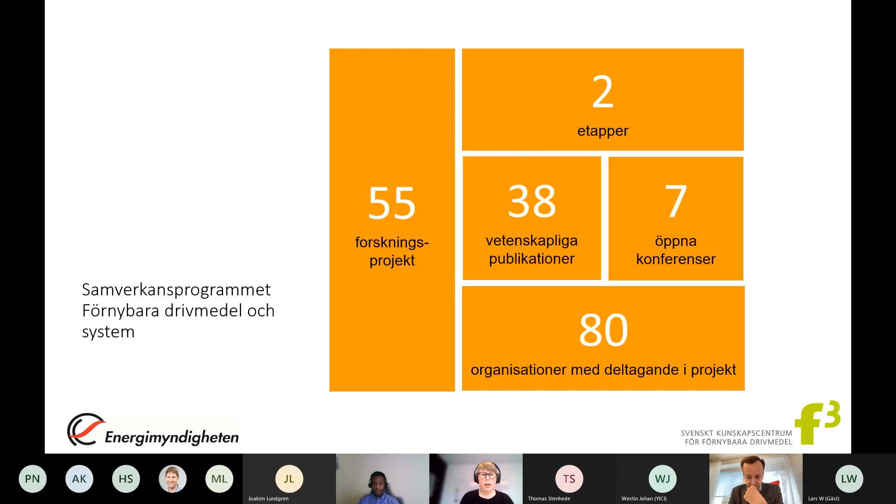Några ord kort om F3. Vi är en samverkans- och nätverksorganisation där vi samlar industri, högskolor, institut och myndigheter som delar synen på långsiktigt hållbar drivmedelsförsörjning till transportsektorn. Våra parter är en akademigrupp med Lunds universitet, SLU, KTH, Chalmers och Bio4Energy, som är ett samarbete mellan Umeå universitet, LTU och SLU i Umeå. Sedan har vi industrigruppen: Lantmännen, Preem, Neste, E.ON, Scania, ST1 och Volvo. Vi har de tre stora forskningsinstituten på området, IVL, RISE och VTI, samt samarbete inom samverkansprogrammet med Energimyndigheten och för övrigt inom F3 med Västra Götalandsregionen.

Vi har ingen politisk agenda och ägnar oss inte åt lobbying eller något sånt. Utan det här är helt och hållet samverkan och kunskapsbyggande som är i fokus.

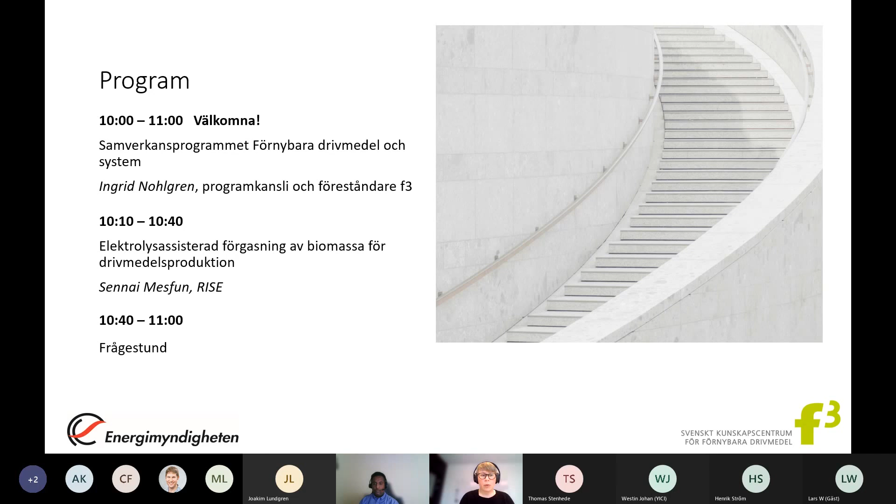Då återgår vi till programmet här. Vi ska strax få lyssna på Sennai Mesfun som ska hålla sin presentation, och det kommer han göra på engelska. Den efterföljande frågestunden kommer också att vara på engelska. Avslutningsvis, här har vi lite korta fakta om projektet.

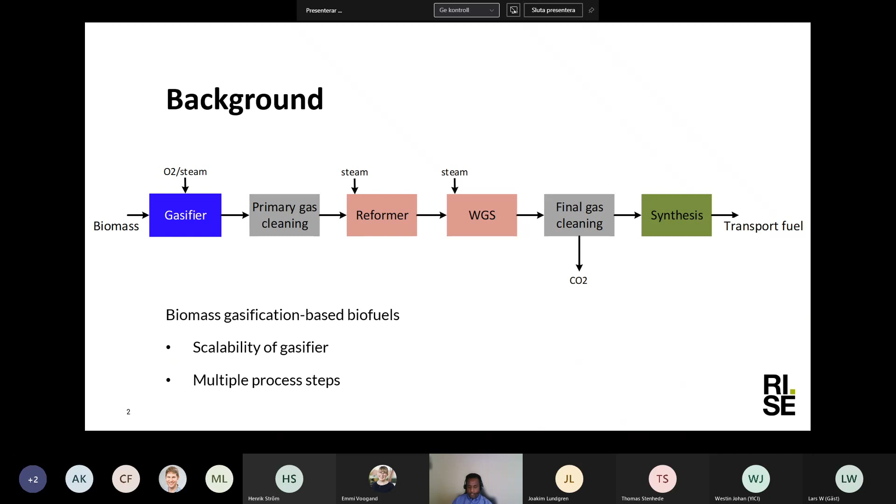In that regard, this project looks at electrolysis-assisted biomass gasification, where an electrolysis process integrates into the system, if possible reducing some of the downstream processing required, and also co-produces some of the internally required oxygen as an additional incentive.

But the most important aspect of integrating an electrolysis process with gasification is, of course, to increase the productivity without having to introduce an additional carbon source, or in other words, without scaling up the gasification step.

This project specifically looks at that, and at what cost, to what extent the product yield can be boosted without an additional carbon source, and either way, the possibility to reduce some of the process steps in a conventional gasification-based process.

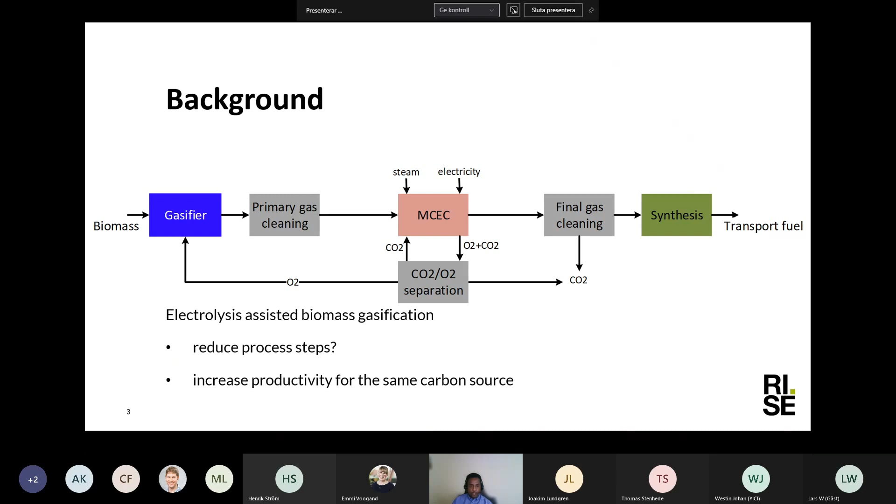So in order to frame this, we defined an objective: to investigate a molten carbonate electrolysis cell for syngas conditioning. How far can this take us when it comes to improving productivity, reducing some of the process steps, and at what cost can that be achieved?

Another additional advantage or benefit to look at is to what extent we can link electricity into producing liquid fuels, in the context of power-to-liquid in this case.

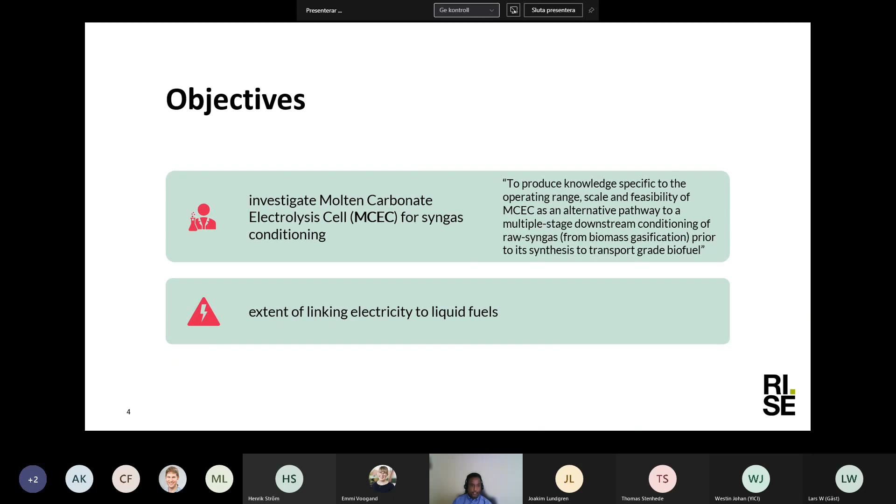So in order to frame this study from a system perspective, we opted to integrate a sustainable aviation fuel production facility at a generic sawmill as a host facility.

In a typical Nordic sawmill, about 50%, or half, of the incoming timber ends up in the byproduct stream, and the remaining half becomes the final lumber product. In business-as-usual operation, this byproduct would largely be exported to other forest industries, such as pulp mills in the form of wood chips and wood pellet plants in the form of sawdust.

But central to this is the integration of the MCEC in that gasification-based SAF facility, since MCEC is the technology that we decided to study further in this project.

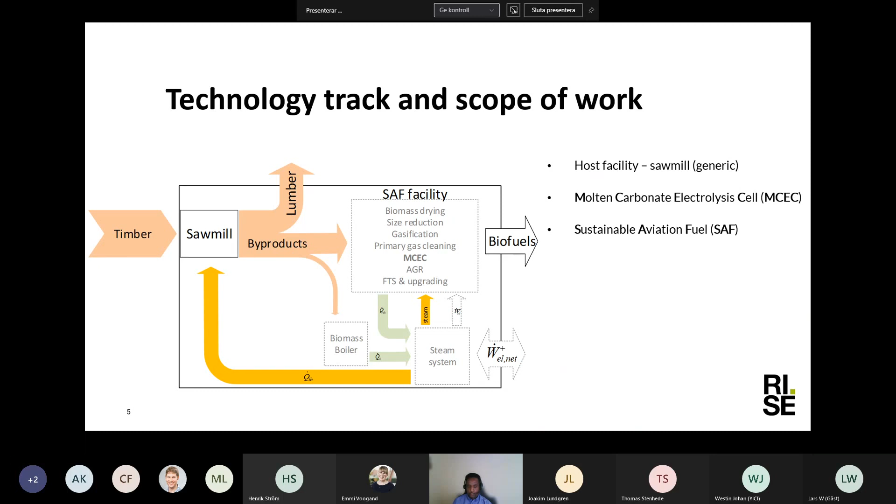It will be important to say a few words about it: its operational parameters and what our model was based on. We developed an MCEC model based on previously conducted experiments at the Royal Institute of Technology at lab scale, and operational data from those experiments was extrapolated to develop a model for this project.

So of course, as is the case for most electrolysis processes, the polarization curve is very important, which is the voltage-current curve. The stack temperature is also of importance, especially since the carbonate cell is operated using lithium or potassium carbonate, which should be in a molten phase, so the temperature is fairly high. We wouldn't want to supply external heat; we would like to maintain the unit at the temperature that can keep the electrolyte in a molten phase.

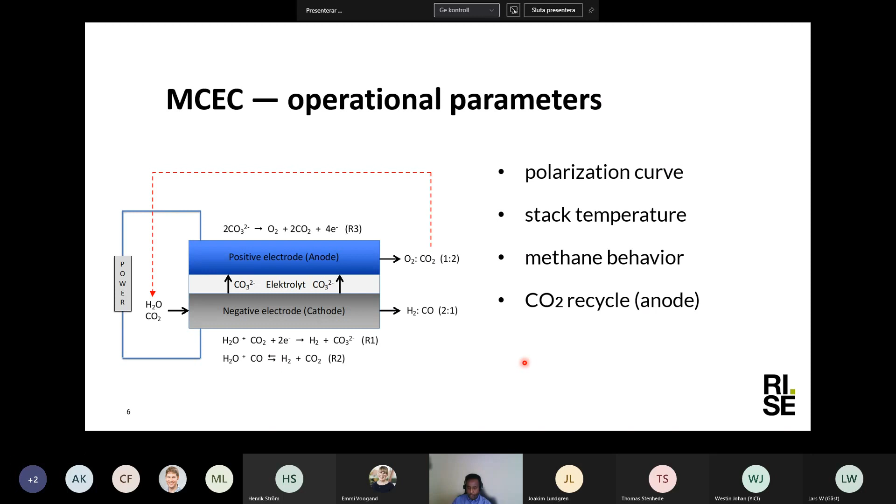The other aspect is, of course, as I mentioned, stack temperature, and there is no strange relation here. The higher power consumption leads to higher stack temperature, and of course, to higher current density.

But when it comes to methane, which is a key component in the syngas, depending on the downstream process - for example, if synthetic natural gas is the final product, then pronounced methane in this unit could be of interest. But if FT is the upgrading technique, then methane is not a desired product. So it's good to study that as well.

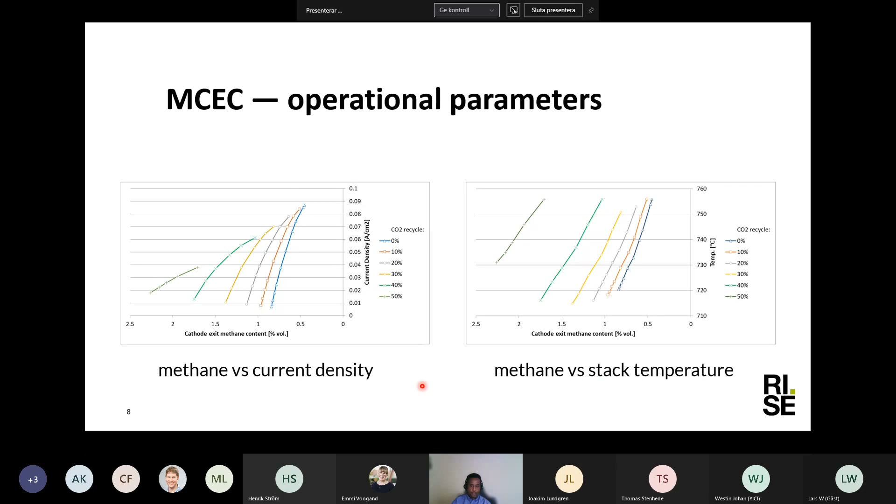With that, I would like to present the cases we have specifically evaluated in this project. We have evaluated 3 gasification technologies, each with 20 megawatt lower heating value syngas capacity. The first technology was the WoodRoll technology developed by Cortus Energy, a dual fluidized bed configuration similar to the GoBiGas plant in Gothenburg, and a bubbling fluidized bed directly heated with oxygen as fluidization medium, similar to those developed by Andritz Carbona.

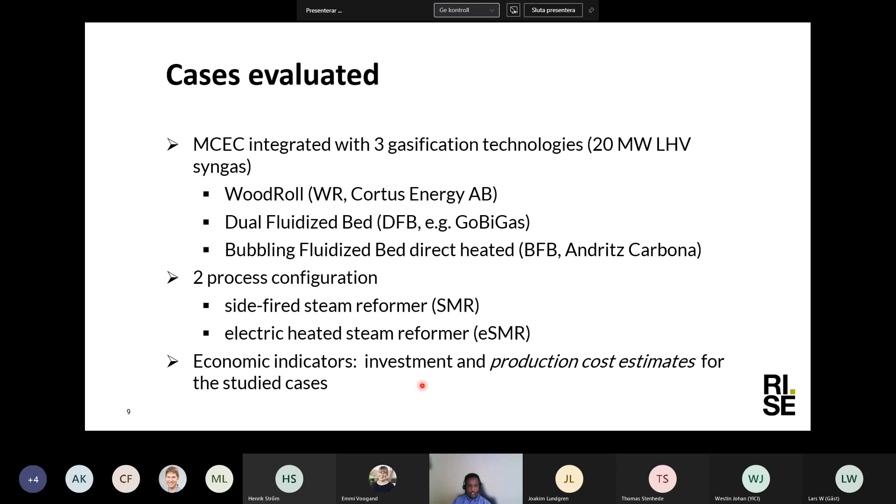And another one is a more advanced technique, currently under development - an electric heated steam reformer. The electric heated steam reformer kind of saves carbon loss in the reformer, as it doesn't sacrifice part of the gas. Instead, the reactor is heated with electricity. And in the economic aspect, we have looked at the investment and production costs as indicators for the cases studied.

So this is a typical configuration presented here as an example. As I mentioned earlier, a sawmill will result in about 50% of the incoming timber as byproduct. Our target here is to upgrade the mixture of sawdust, wood chips, and bark into a final FT product, but the intermediate step in the gasification process is the one that scales the whole thing.

As I mentioned earlier, a 20 megawatt syngas is our target. So in case we run into steam deficit in any of these process steps, plus the steam demand of the sawmill, then we have a biomass boiler that combusts part of the biomass in order to supply the process steam.

And in comparison to a conventional gasification-based technique, the main difference is that the MCEC replaces the water gas shift of a conventional process.

And in doing so, our main contribution is that we can capture part of the carbon dioxide already by the MCEC, which unloads the carbon separation requirement afterwards before the FT upgrading and acid gas removal unit. That's one benefit. The other is that we retain as much as possible of the carbon that

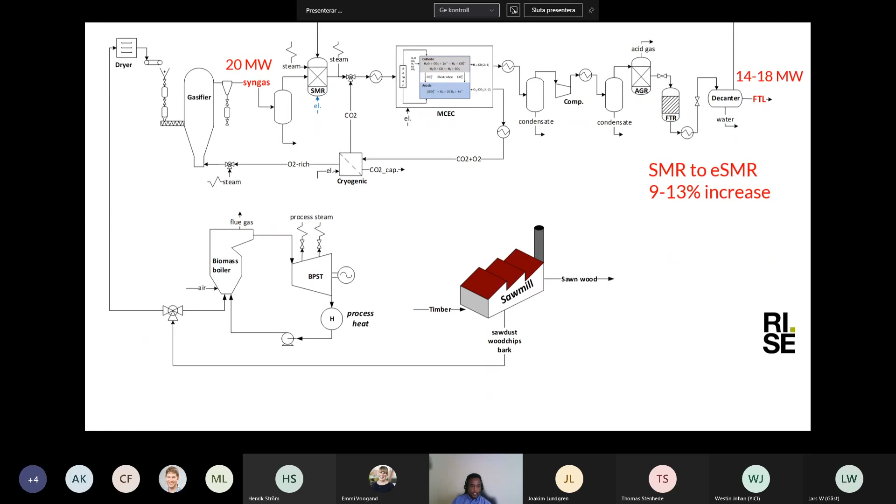And for that, here I present a Sankey diagram for carbon balance in the different process steps. This is an example for the dual fluidized bed case.

The one to the left is referring to the conventional steam reformer scenario. And as you can see, from the incoming biomass, this is the carbon balance normalized to the carbon in syngas. About 31% of the carbon is already lost generating the heat required to drive the gasification process.

So this 31% doesn't even get to the MCEC. So there is a very limited window where the MCEC can contribute in this case. And that's why the increase was not that significant for the dual fluidized bed.

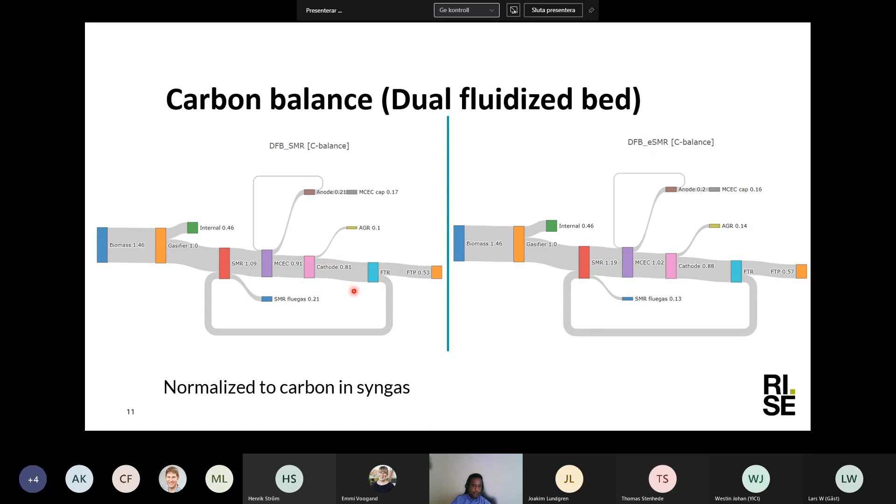If we compare it against the bubbling fluidized bed case, where the carbon loss in the gasification stage was only 11%, then you can see the contribution of the MCEC was quite magnified. It contributes both in terms of fixing carbon into the system as well as capturing carbon and reducing the load on the AGR unit. All at the same time, it also increases the yield of FT.

So these kinds of presentations really point us in the direction of where we are losing most of the carbon and what we can do about it.

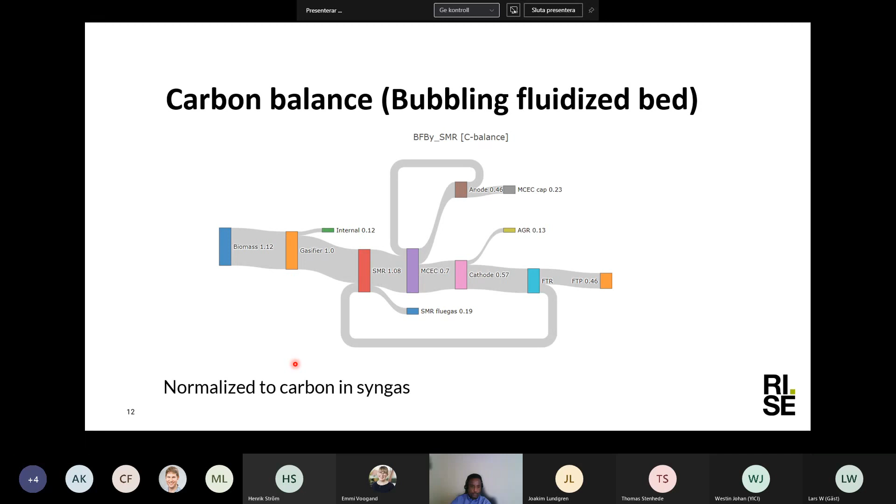With that, I would jump to the economic performance. Here I present the most relevant economic parameters: cost of biomass, electricity, oxygen, scrubber oil, which only applies for the dual fluidized bed configuration, and some economic assumptions.

An annuity factor of 0.1 was used to annualize the capital cost. This corresponds to a 20 year economic lifetime and 8% interest rate. And a generic operating and maintenance factor of 3% of the total fixed capital investment was applied for all cases.

And based on these economic parameters, we arrived at a production cost over the total FT. As you know, with every FT technology, there is a wide spectrum of products: diesel range hydrocarbons, SAF or aviation fuel hydrocarbons, and a small fraction of gasoline range hydrocarbons. So we are taking the cost in this case over the total FT yield.

And we arrived at a cost between 1,400 to 1,550 Swedish krona per megawatt hour. To give some perspective, the current market price for HVO diesel is around 1,200 Swedish kronor per megawatt hour. Compared to that, we are off by about 300 Swedish kronor per megawatt hour over total FT yield.

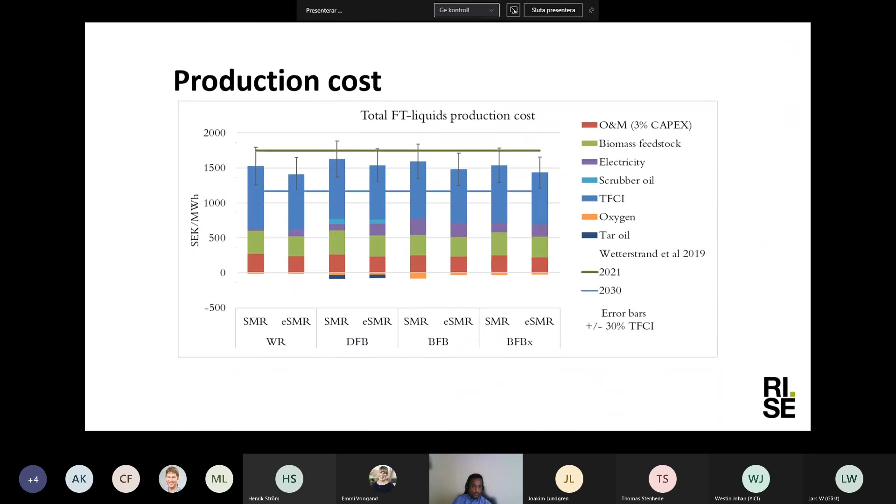To put it into further perspective, I have compared the results to the investigation carried out by Maria Wetterstrand in 2019 about sustainable aviation fuel production in Sweden. According to their investigation, they arrived at costs for 2021, shown by the green line, and for 2030, shown by the blue line.

Compared to that, our results are in all cases between the two ranges specified in that investigation. And as you can see, most of the production cost derives from the capex, which is about 55% in most cases, the blue bar.

So the system is highly sensitive to that, and I introduced a sensitivity on the total capex, plus or minus 30%, and the error bars show where the production cost depends on that factor. So, in general, it would remain below the estimate for the year 2021 for SAF production.

With that, I will jump into some concluding remarks. Depending, of course, on the gasification technology, the activity of the MCEC has varied quite a bit.

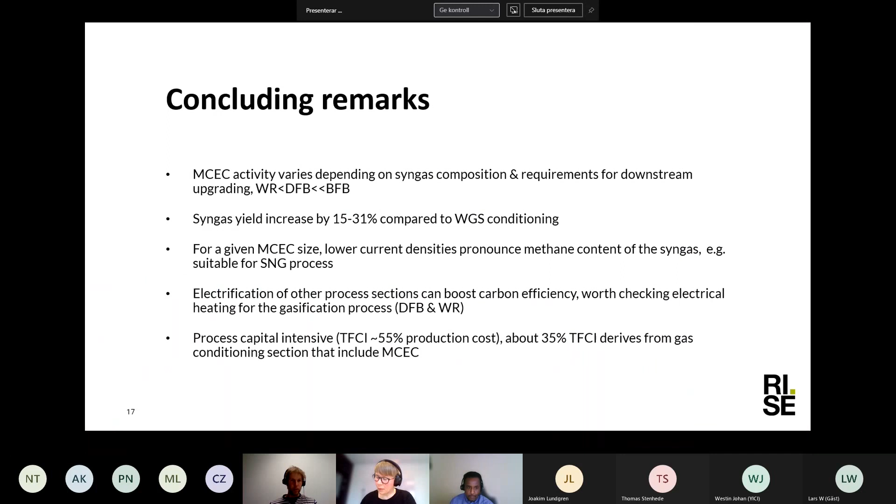You showed this sensitivity or trade-off for operating cost and capex of the MCEC, the carbonate cell. What points did you choose, or how did you choose the operating points in the FT framework? Was that a fixed point you had, or did you do some kind of optimization?

Yeah, we did an iterative approach, but at the end, of course, you have to end up with one point in the model. But you see, for all these points, we have derived the syngas composition basically for all the points shown in this figure.

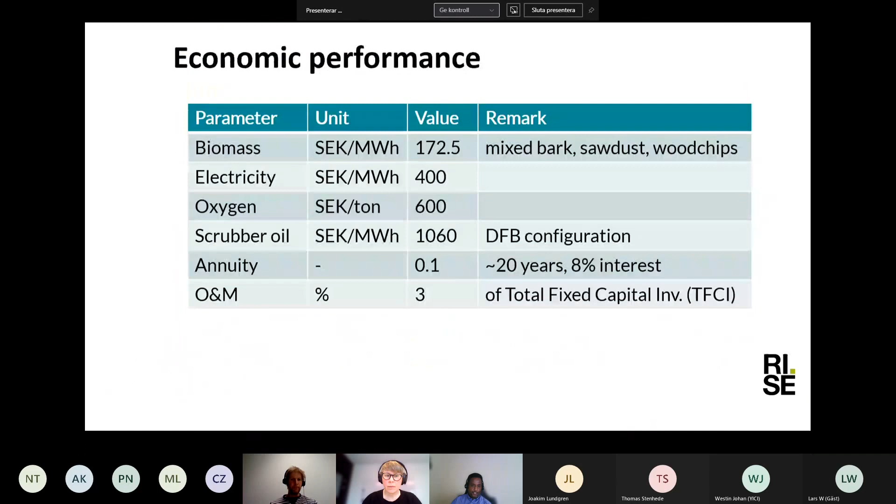Then what we did was evaluate, as you noticed in the results, there are 8 scenarios. The bubbling fluidized bed, for example, has two cases: one with high yield, meaning we don't really care about electricity use in the process, we just want to boost the FT yield. The other is optimum, meaning we go for an optimal point where electricity consumption is okay and the yield is okay, optimal from an economic perspective.

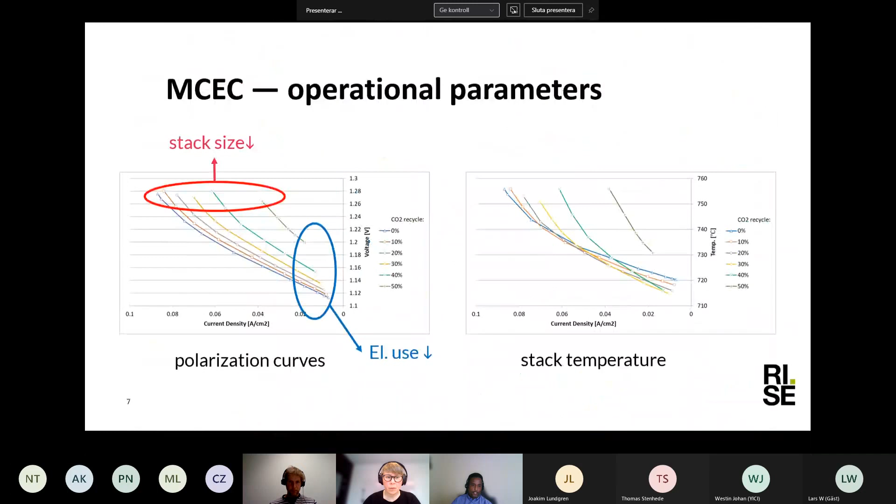We did that for the bubbling fluidized bed, where the MCEC activity was quite high as shown in the results, but we didn't do that for the WoodRoll and the dual fluidized bed. For all the points shown in this map, we derived the syngas composition and tried to select the optimal for FT, where the hydrogen to CO ratio is necessarily 2, and the methane content was as low as possible.

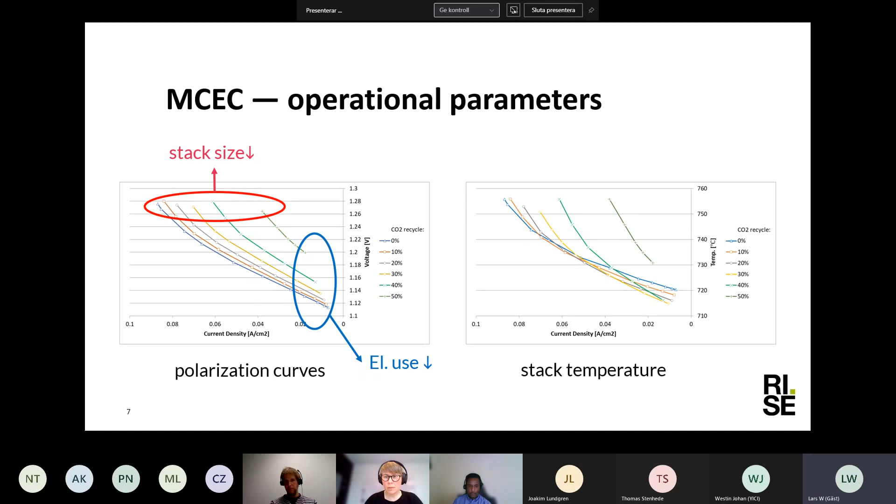I missed, thank you very much, Sennai, for this presentation. Interesting and very good. But I missed the figure on how much electricity you actually use in relation to the 20 megawatts of biomass you started out with.

Well, there are multiple points, as indicated here. For example, if we are referring to the electrified SMR, there is a cryogenic separation that takes electricity as well, and then the MCEC itself.

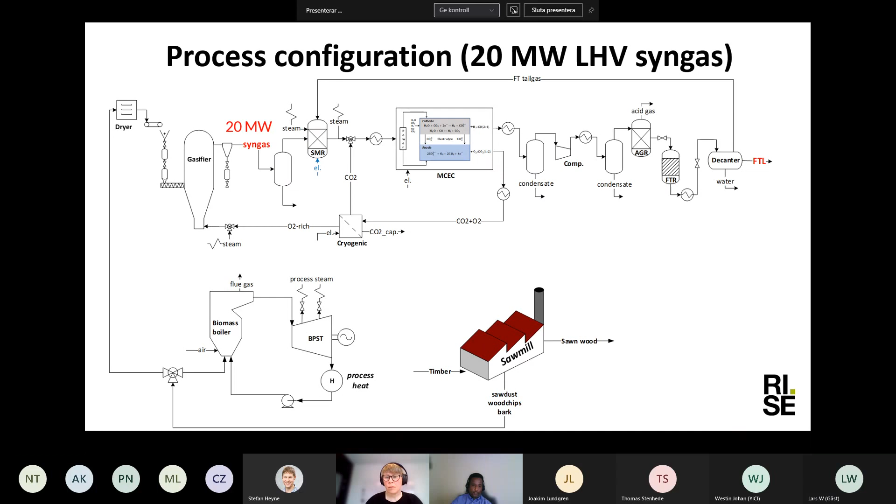But for the highest case, it was for the bubbling fluidized bed, around 6 megawatts for the MCEC alone. I don't remember the numbers for the cryogenic separator and electrified SMR cases, but we can look at the contribution of costs from electricity too, which can tell some story by itself. This is the aggregate electricity for all the units, and it was around 6 megawatts for the bubbling fluidized bed case, where we opted to maximize the yield at the cost of increased electricity use.

That would be the highest, the violet bar, number 4 from the right-hand side. This is the bubbling yield case. Okay, thank you very much.

If you go to the report, you'll find all the numbers in table format. I have read the report, but I didn't pick up on this number at the time. But they are available, go back to it. Thank you.

I see Joakim Lundgren has raised his hand. Please, Joakim. Hi, Sennai, thanks a lot for a very nice presentation. Good to see you again. Long time.

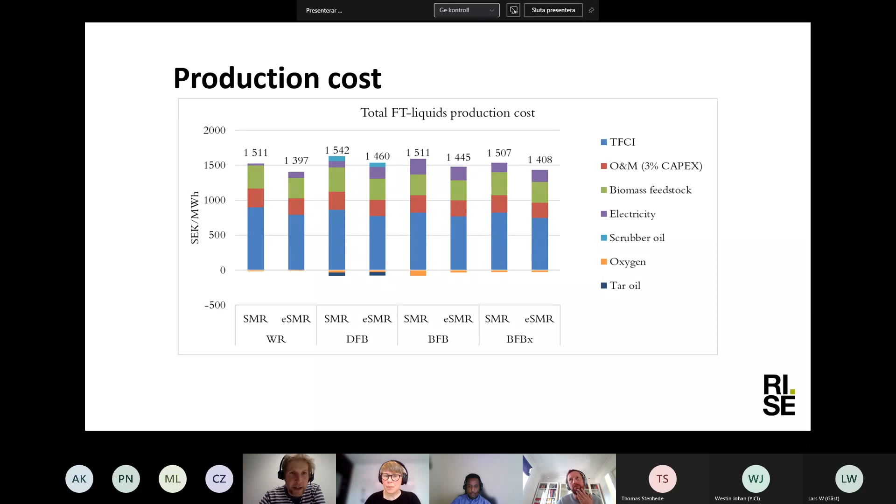Yeah, just wondering when you recalculated the costs to aviation fuel only. Did you, or maybe that was included already in the basic calculation, is there an upgrade or a separation of the different components, or did you just do a numeric exercise recalculating, allocating some revenues for the byproducts, or did you add splitting up the streams to actually have the pure products like diesel, gasoline fraction?

Yes, that's a good question. We have some data from developers, actual technology developers, on that. At least we evaluate how much hydrogen is being required, and different fractions of the hydrocarbons are kind of calibrated based on technology developers' data. Apart from that, of course, it's a numerical exercise. But at least the hydrogen consumption and the fractions are kind of calibrated to actual data.